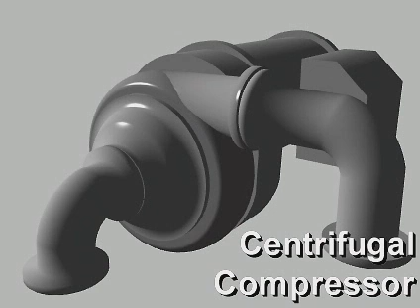Let's examine the centrifugal compressor, which uses non-positive displacement vapor compression for compressing large amounts of refrigerant and are typically used in very large capacity cooling systems.

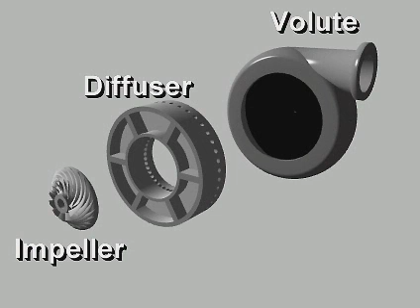A centrifugal compressor has three basic components: an impeller, a diffuser, and a volute casing. Large capacity centrifugal compressors may have two or more impellers or stages in the same casing.

Centrifugal compressors are usually driven by hermetic electric motors. However, open-drive centrifugal compressors are also available for applications using steam turbine, gas turbine, or engine drives.

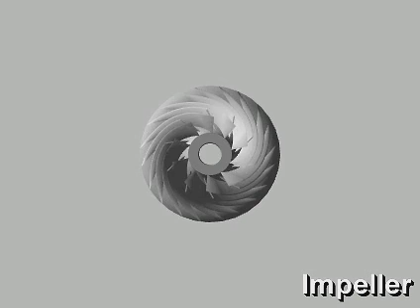The impeller is a rotating circular disc with curved blades that is driven at high speed by the electric motor. As the impeller rotates, it moves refrigerant vapor from the suction opening in its center to the outer edge using centrifugal force. The vapor enters the suction at a relatively low velocity and leaves the outer edge of the impeller at a high velocity. This means that the impeller transfers its rotational energy to the vapor, but high velocity does not relate to high static pressure.

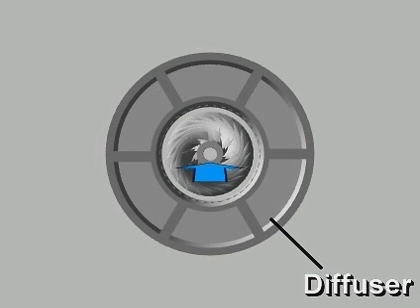To achieve the desired pressure increase, or compression, the vapor must be slowed down, converting its velocity pressure to static pressure. That's where the diffuser comes in. As high-velocity vapor moves radially outward through the diffuser, the flow area increases, slowing the vapor and increasing the static pressure. Some centrifugal models have diffusers with vanes or pipes which change flow direction and further slow the vapor.

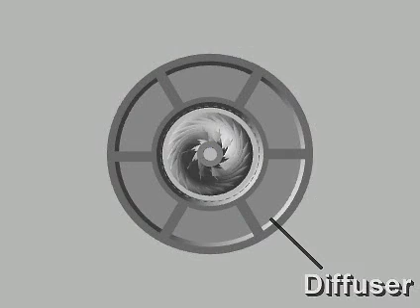The volute-shaped casing collects the slow-moving, high-pressure vapor from around the diffuser and conveys it to the discharge connection of the compressor. Inlet guide vanes control a centrifugal compressor's capacity.

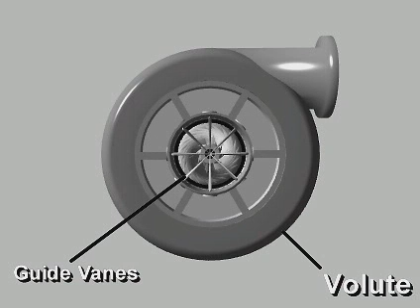These movable vanes are located in the suction opening. With vanes turned fully open, the compressor produces its full cooling capacity. As the vanes are closed, they reduce refrigerant flow through the compressor, reducing the capacity of the refrigeration cycle.

In addition, capacity control in a centrifugal compressor can also be obtained by changing the rotating speed. This concludes our segment on the mechanical non-positive displacement vapor compression cycle using a centrifugal compressor.